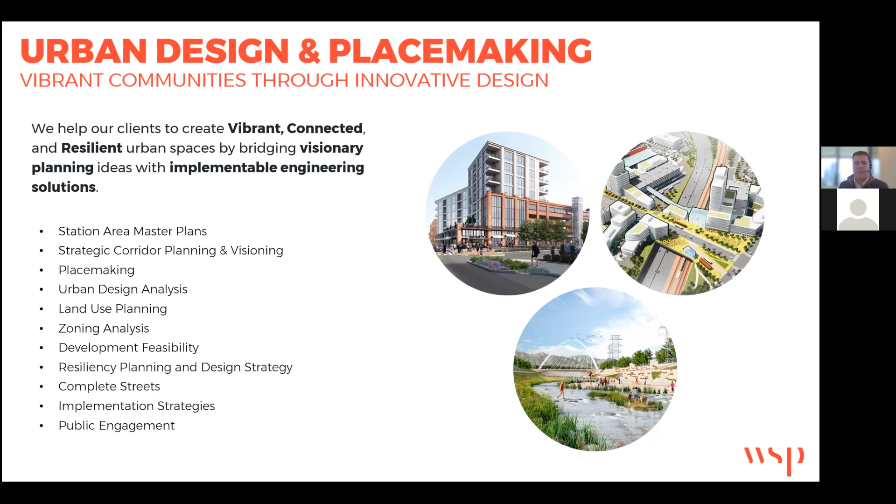What we've seen over really the last 200-300 years is just an increase in urbanization. That's not a new trend. I'm sure you're roughly familiar with it at a global scale, but it's happening at a phenomenal rate and continuing to do so. Our cities have always struggled to respond to these new innovations and the rapid population growth and shifts. Through globalization, of course, we saw massive shifts in population as well, so some cities grew and others began to shrink.

What we're seeing now as we move into the information economy and the revitalization of manufacturing at different scales, beyond just heavy manufacturing, is the revitalization of urban cores within the United States. No place is this more predominant than in the Midwest, where a lot of the earlier manufacturing left for various reasons, and the population with it. It's taken about 50 plus years to really recover and draw talent, the intellect, the human capital back under new industries, new ways of generating revenue and economic transactions.

Now that we're there, our cities have had to adjust. Many of them were built around earlier forms of transportation—railroad, and then subsequently the car. Now they're having to adapt yet again to kind of stitch back together some of the impacts that have happened. That's one of the things we're going to talk about today in our case studies.

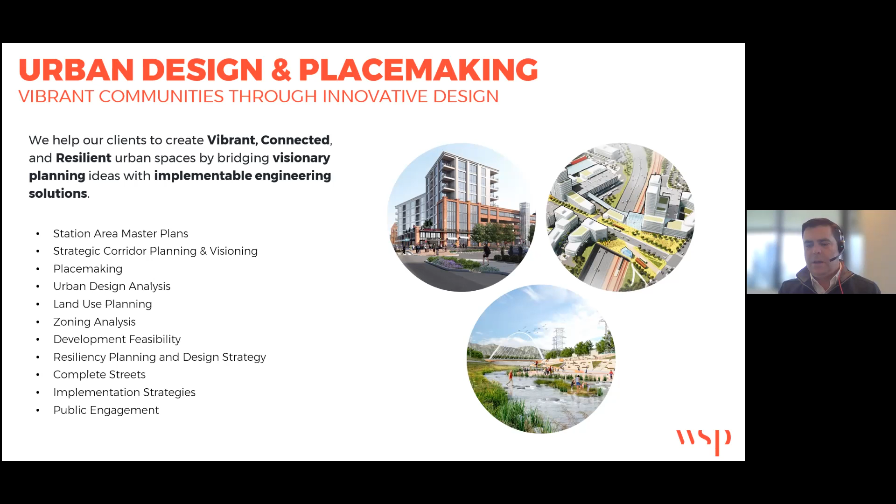So what are we seeing in terms of trends? We're seeing connected communities being a huge driver. Communities used to be connected by the automobile primarily, at least in many cities across the Midwest and beyond. But now we're seeing multiple modes of transportation—micromobility, pedestrianization, the increased use of rail, light rail, and intercity rail systems—as well as the gig economy with shared resources like the automobile or electric scooters.

In order for that to work, we need places we feel safe to move through. That's requiring an adaptation of the infrastructure built in many of our cities, focused really on rapid movement of the automobile. One trend we're seeing is stitching back together, reconnecting communities that may have been divided through large infrastructure projects that rolled through as part of urban revitalization programs in the 50s and 60s here in the United States. Along the way, we realized that many of the moves we made had negative impacts, perhaps accelerated due to rapid climate change.

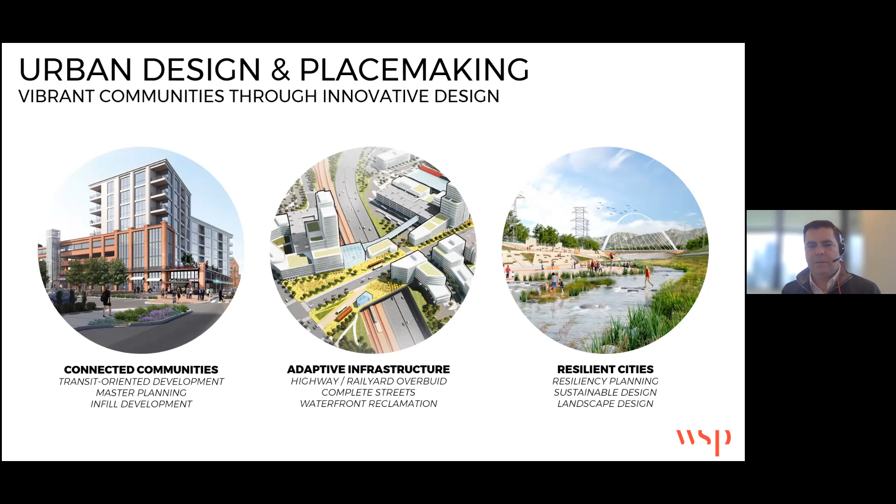Now, with any type of change within the urban environment, we get lots of complexity here. The displacements as one housing typology or density morphs into another. You have economic discrepancies that can emerge from that as people with more disposable capital may move into an area to get access to desired amenities, which has the potential to push people out.

Balancing housing and getting the right level of land use between housing, office, retail, entertainment, cultural, and education is always a challenge, and really falls on people who have to think about these issues long before we put pen to paper or put a shovel in the ground.

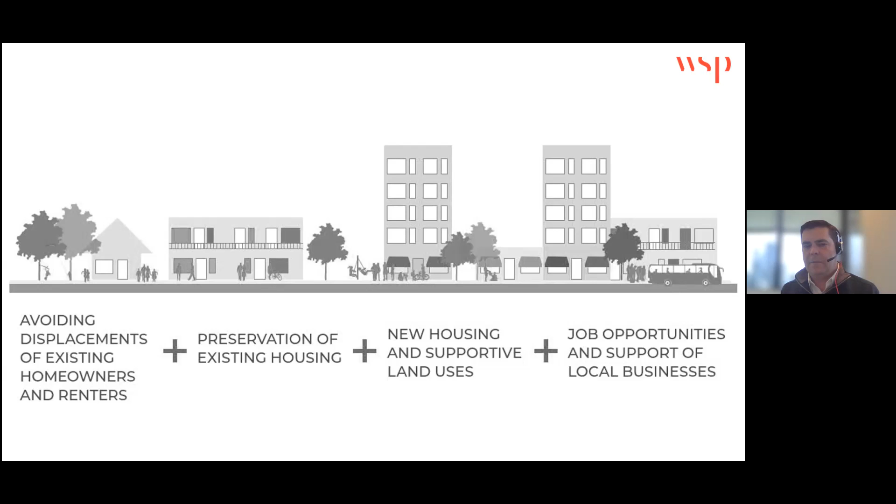And of course, making sure that we're creating job opportunities and access to those jobs, both locally as well as regionally, so that commutes for a wide range of economic backgrounds can get access to those jobs. This is part of what makes everything so complex.

One of the biggest trends we're seeing, which adds an entirely new level of complexity, is the rapid deployment of renewable energy at the utility scale and the balancing of electric demand with this urban development within the variable nature of those renewable sources, specifically wind and solar.

So in the background to everything we're going to talk about within the urban realm is this infrastructure that supports the buildings, the urban spaces, the human capital, the intellectual capital, and the transactions that make the cities generators of the gross domestic product.

So we've got rapidly deploying new technologies and new loads to balance in terms of the electric demand and when we have access to that electricity.

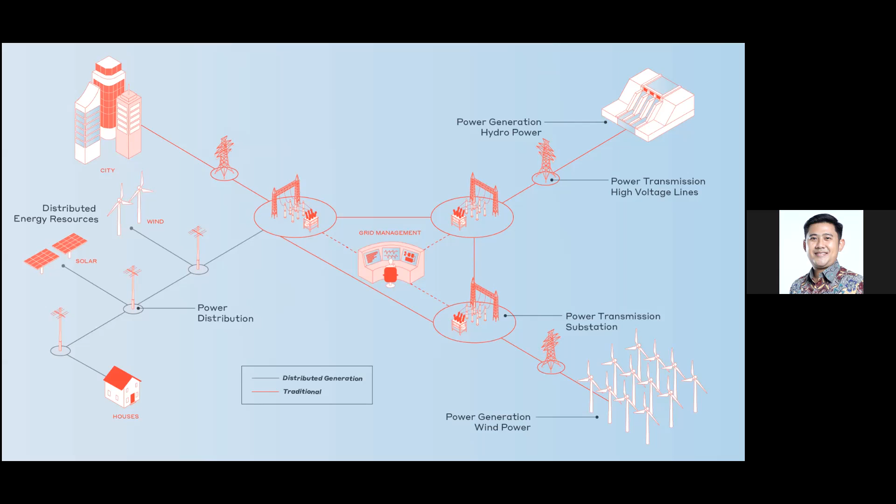And that is creating some interesting opportunities to integrate our transportation systems like electric vehicles with our electric generation systems like renewables, and managing that through not only the utility grid, but also microgrids that may exist, especially in some of these larger sites and larger developments within urban cores.

One of the things we're seeing as we begin to plan out these larger developments at the district scale is beginning to shift away from natural gas as a component of the heating and cooling, or even the manufacturing that may be going on in some of these sites.

That's relatively new, a new way of thinking, a new way of planning, a new way of discussing infrastructure. And it's creating some really interesting opportunities to integrate our transportation systems, our energy systems, our water systems, and ultimately our building systems into a cohesive package.

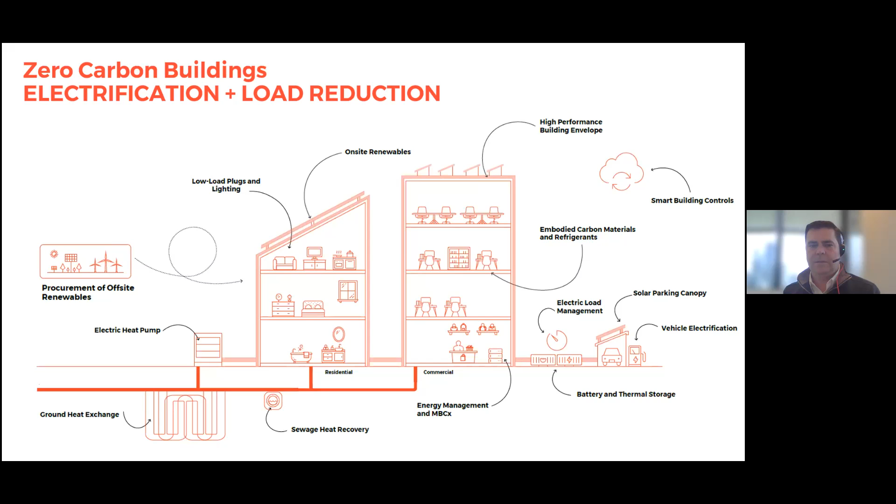So I just want to show some of the projects that have been going on where we're beginning to see some of these trends play out.

One of the things we're seeing is the need for transit-oriented development, and using transportation as a way to spur the right type of development that balances the pedestrian environment, multiple modes of mobility, and economic opportunities.

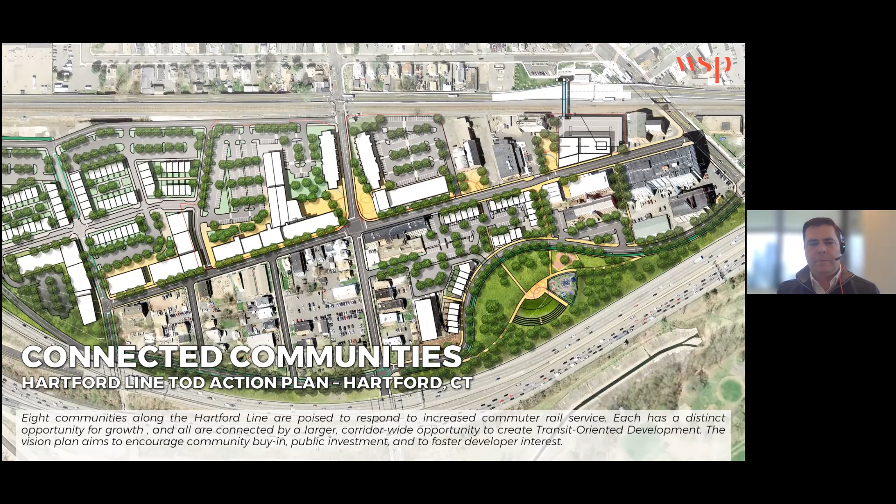Making sure that we're thinking about complete streets. No one is saying that the automobile is going away, but realizing that the automobile shares the streets with the public, the pedestrian, the bicyclist, and micromobility platforms in a way that is safe and inviting.

And that actually, we know, creates additional economic revenue by generating more points of sale, a more pleasant environment, and a more safe environment.

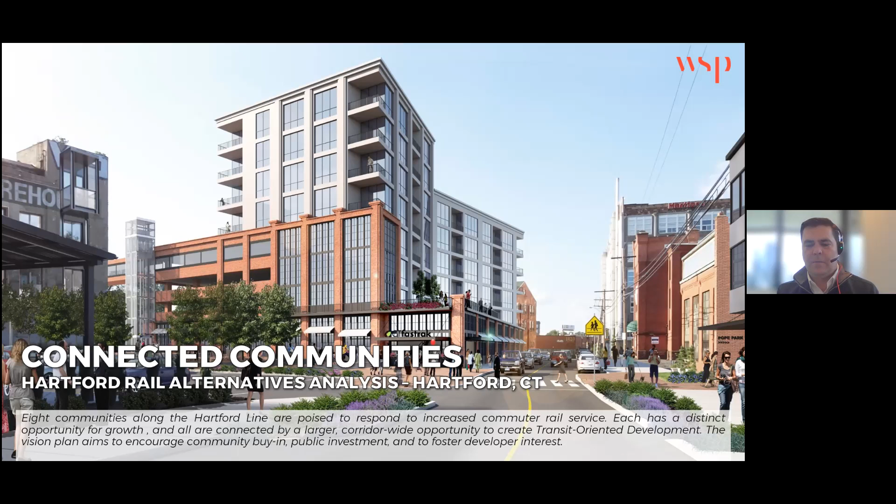And this also is spurring the kind of reinvention or reimagining of the town center, thinking about what it means to have a live, work, play environment, a 15-minute walk to all the amenities and resources you may need, what that lifestyle is like, and how technology connects it all together, whether that's Wi-Fi or just high-speed internet access.

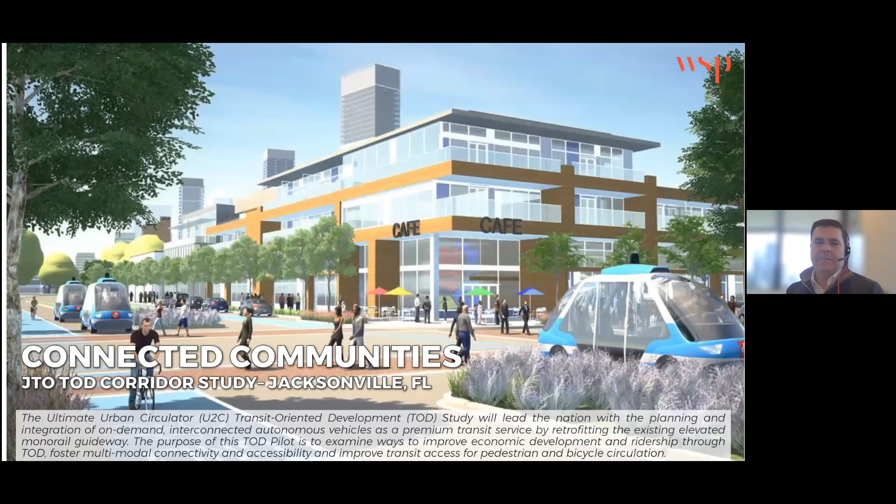Or thinking more about digital twins as a way to manage these assets and make sure that they maintain their profitability and efficiency. One of the things planners really need to focus on is making sure they are simply suggesting land use patterns and densities and creating the framework for these exchanges, these exchanges of intellectual capital, human capital, and ultimately economic exchanges.

So the examples you see here are just suggestive of buildings and providing guidelines to developers and visualizations to decision makers, rather than explicitly developing architecture.

One of the trends here is utilizing the abandoned space above many of our transportation systems. And that's an inherently expensive proposition to bridge over a large highway or rail system to stitch back together that scar. But the advantage of that is that it unlocks a lot of underutilized land within our urban cores. So you see here land bridges where reconnecting or expanding the usable space, whether it's parkland or developable land, to stitch back together a neighborhood which has been separated by a transportation system.

It's an incredibly useful way to add value to land on both sides of the highway, taking what had been something that buildings would turn their back to, or that may be seen as a negative to the land value, and flipping that into an amenity, covering it, reducing the noise or air quality issues through overdecking. And that is what the case study I'm going to talk about here in just a little bit really strives to do.

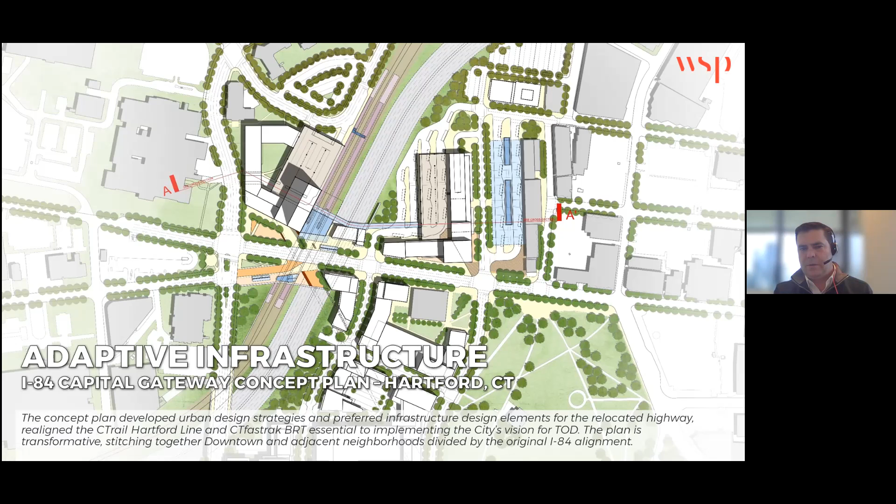There are many examples of this happening at various scales across cities in the United States and elsewhere, where unlocking the value of the air above these transportation assets spurs development and creates the opportunity for innovation corridors. We're seeing light manufacturing pop up around here because having access to the highway is important for distribution. It's also allowing landlocked or previously landlocked institutions, like higher ed campuses, healthcare campuses, science and technology campuses, to expand into areas that were maybe on the fringe.

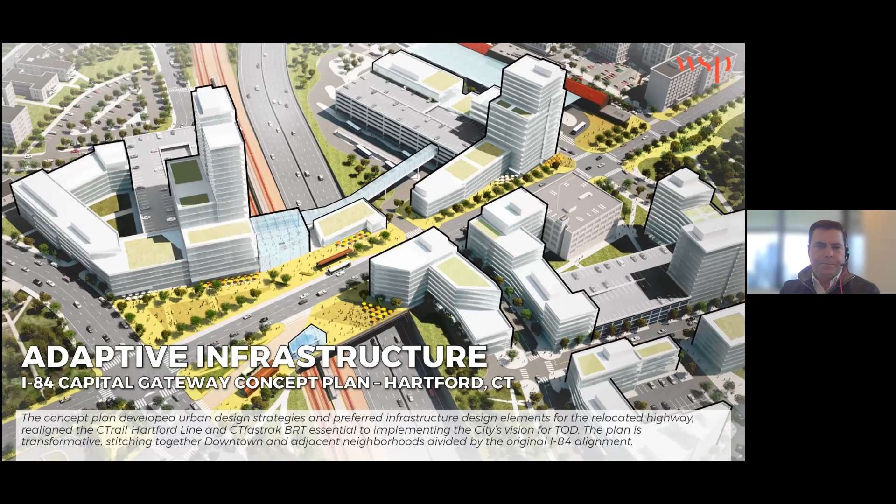So the area, the land directly adjacent to a transportation system or an infrastructure system, or directly above, is key when thinking about the flow of the pedestrian, the flow of multiple forms of mobility over or under these infrastructure systems that were built in the 50s and 60s to make automobile traffic more efficient in and around our cities.

I think at this particular time, there's sometimes a trend to thumb your nose at older technological solutions like highways, without understanding the times or putting the decisions that were made in context. The reality is that many of those transportation systems built in the 50s and 60s solved huge problems that the cities were facing, and enabled transportation networks and the supply of goods and services to our cities.

It wasn't necessarily done the way it was envisioned. Many of these were envisioned to be overdecked, but there wasn't enough money. So now we have the opportunity to unlock that value by going back in and reevaluating those systems, thinking about how we interlace, intertwine, or connect multiple forms of mobility there.

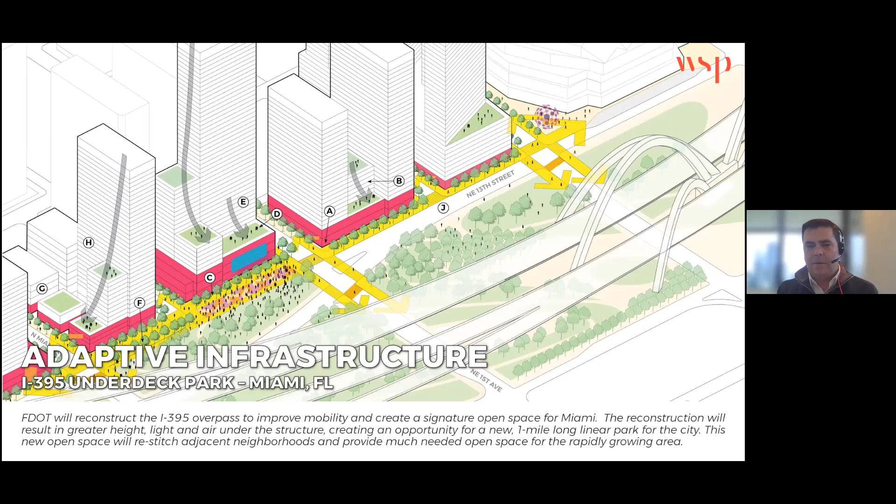And not only our transportation systems, but also other infrastructure systems, such as water management systems and culverts, realizing that the movement of water is important not only for flood prevention and water management, but also to create an amenity. So taking an area that may have been underutilized or not necessarily driving value and creating an amenity is a trend we've seen for quite some time now, and we expect it will continue.

Once that infrastructure system is converted into an amenity, it suddenly drives the value of the land and works as an attractor, and that can create new opportunities and generate new revenue for the cities.

One of the challenges here in Chicago, as I begin to switch to our one central case study, is that a city government generates revenue primarily through taxation of some sort. That taxation comes through taxation on income, direct income to individuals who are working and companies that are working in the city, and also through property tax, taxation of the land based off the perceived value of the land relative to its location.

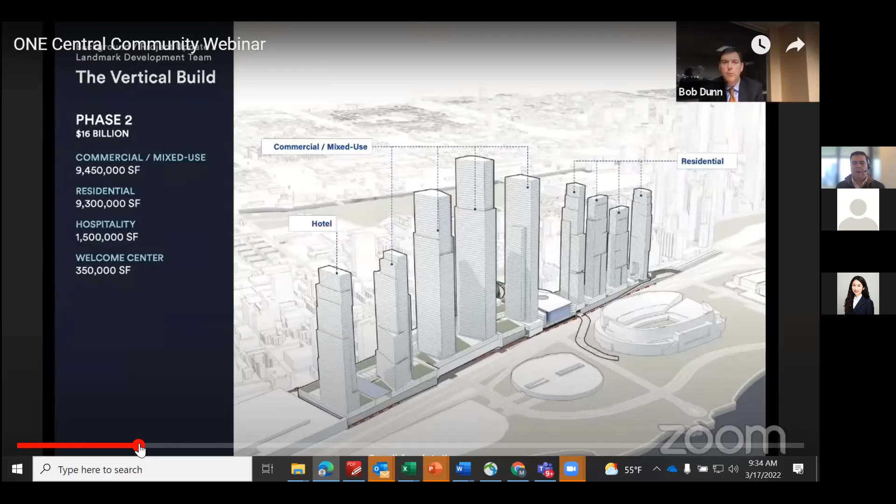This isn't the first time this has been done—it happened in Hudson Yards in New York, another example of underutilized space above a very important railroad connection point. Through platforming it, connecting it to things like the High Line, and creating public realm, you're able to increase the value of that land tremendously.

There's still an argument for ancillary benefits through personal income taxes from created jobs, and spin-off benefits in areas adjacent to the development, where property values and desired amenities increase. This project takes a slightly different approach. I'm probably not the best person to explain all the details, but it's interesting that it creates a public-private relationship specifically around the transit systems and transit hub, in order to turn the asset over to the state and city to run after an agreed-upon time.

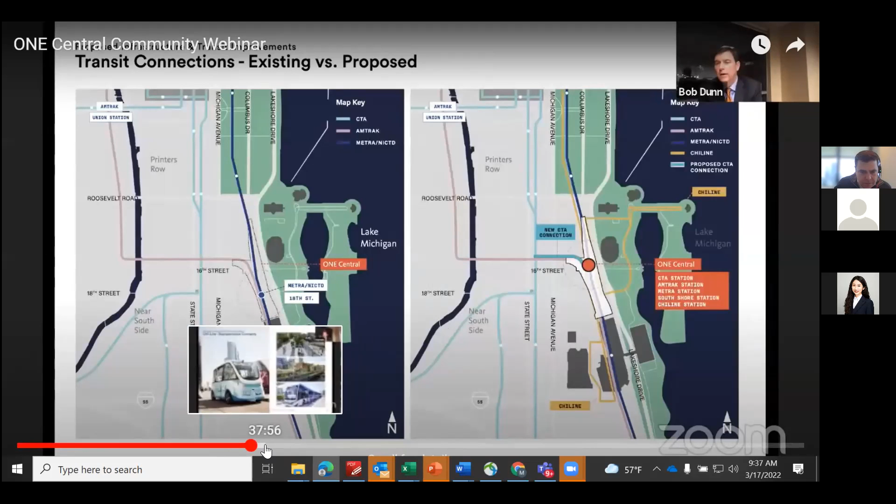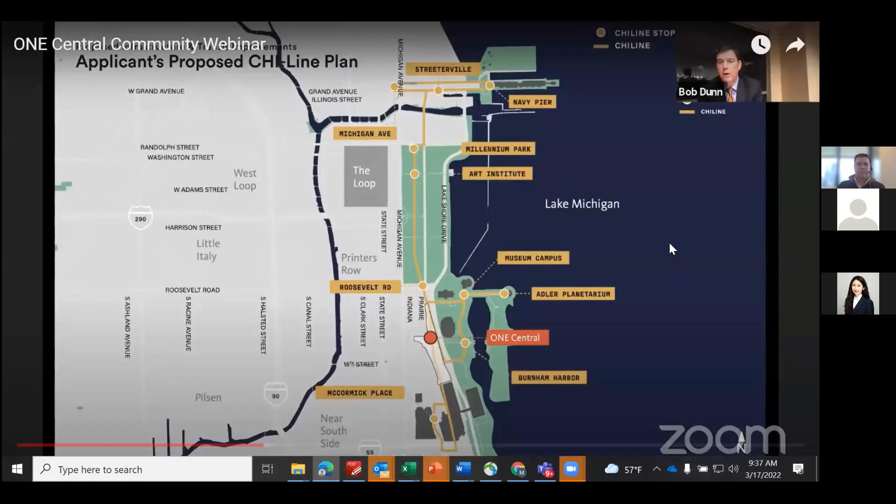I'm going to skip ahead, give me one second to get to the right time frame. I'll hit play and let some of the transit components and architectural endeavors be explained, if I can get my audio to work. Hey Matt, I don't think we hear the audio.

Got it. So this is basically what's referred to as the CHI-Line. It's a proposition to have a bus system, privately supported, but serving the downtown loop area.

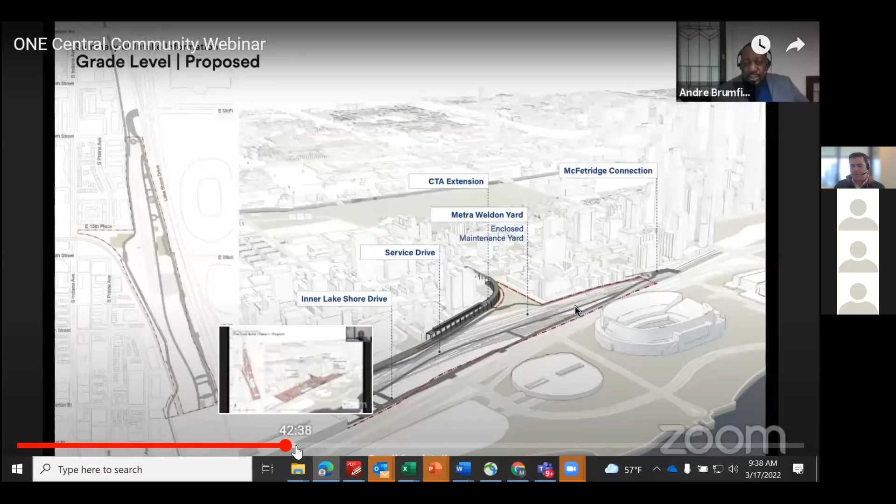I'm going to skip over to the architectural buildup here and talk through some of the components. As we said, there's an existing rail yard, and at one point there was a proposition to have an extension of one of the existing CTA lines. The plan has evolved since then, so the applicability of where we're at currently may have changed.

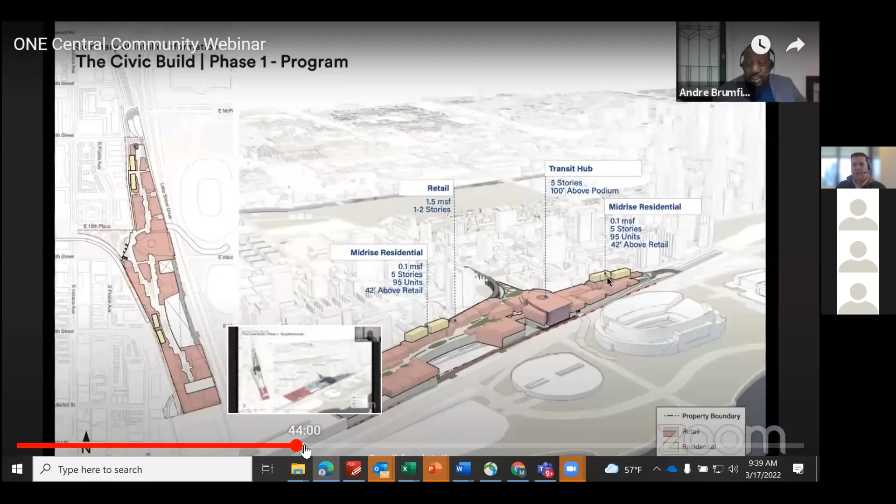Then as a next phase, after some track realignment to allow the structure to engage with the ground, the Civic Build comes in, balancing out a wide range of retail and amenities, the implementation of a pedestrianized urban street, and below parking on a plinth that spans over the tracks. Parking has already begun to accommodate electric vehicles, rideshare, and other forms of mobility.

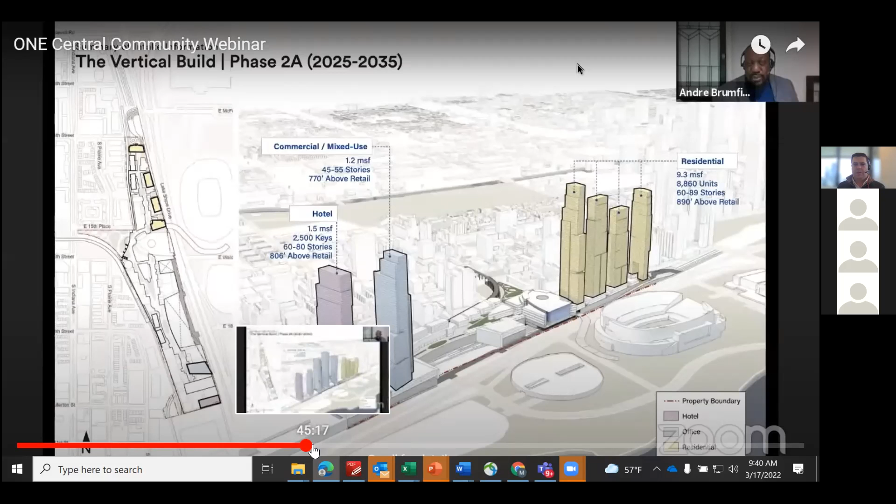Then through a phased build-out, a series of privately developed towers connect into the Civic Build. The exact massing is to be determined, but the advantage of the towers, as you've probably learned, is a dramatic increase in density. And of course, when you have density, you need the transportation infrastructure to allow mobility access to and from these new towers coming in along the lakeshore.

So if we go back, we look at the development patterns in and around what was originally referred to as Central Station and is now becoming One Central. There's a strong connection to some of the land use patterns that have historically existed and the ability to access the transportation networks in and around Chicago.

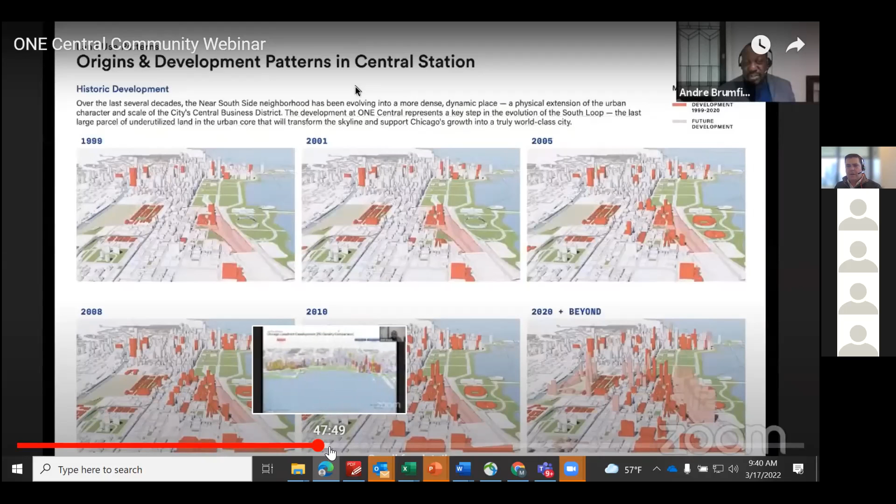So one of the propositions is that this enhancement to the connectivity of the existing transportation systems spurs economic development, not only on the site but in the surrounding areas, by creating jobs and, perhaps most importantly, providing access to those jobs.

This gives you some context to other developments with a similar development pattern over on this side of the city over the last 15, 20 years, increased density in areas that were previously underutilized, generating large amounts of revenue for the city through property taxes as well as personal income taxes.

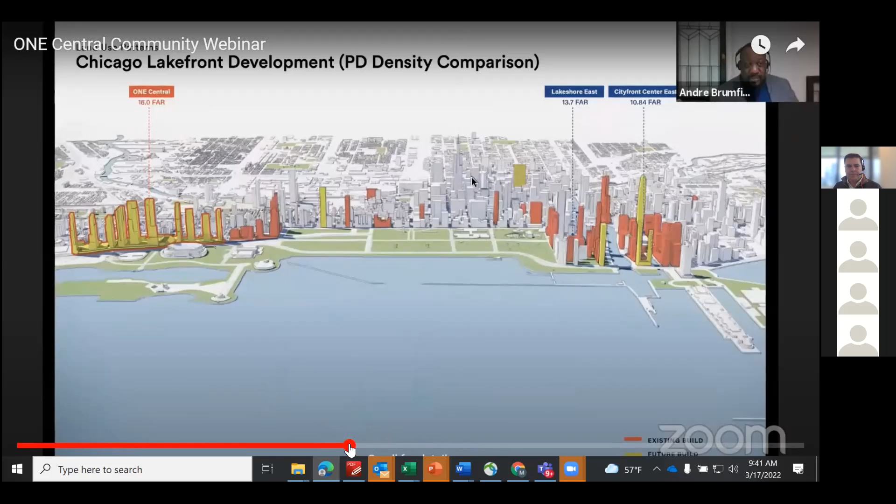Anytime you're beginning to adjust, add, or subtract to an existing land use pattern, there's always fear and concern regarding the impact of that change. And that's where a lot of the engineering comes in, being able to think through those and predict the changes that will occur, and begin to come up with strategies that ideally enhance the overall urban environment rather than creating problems.

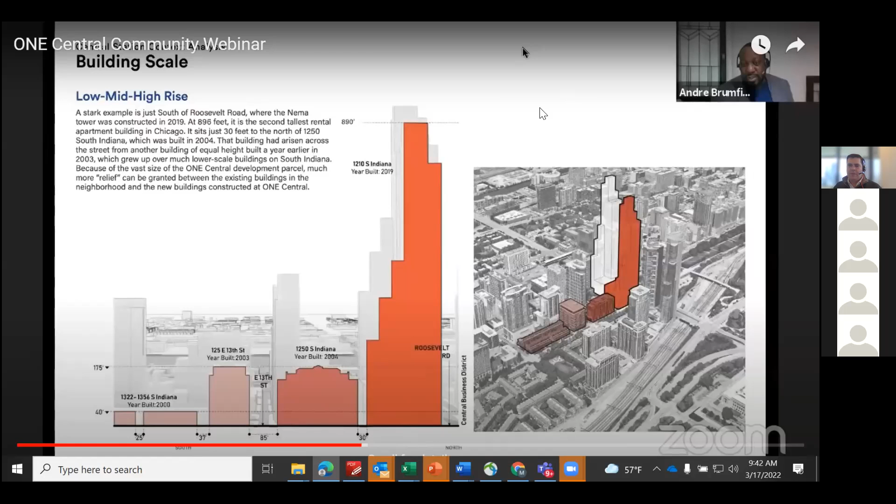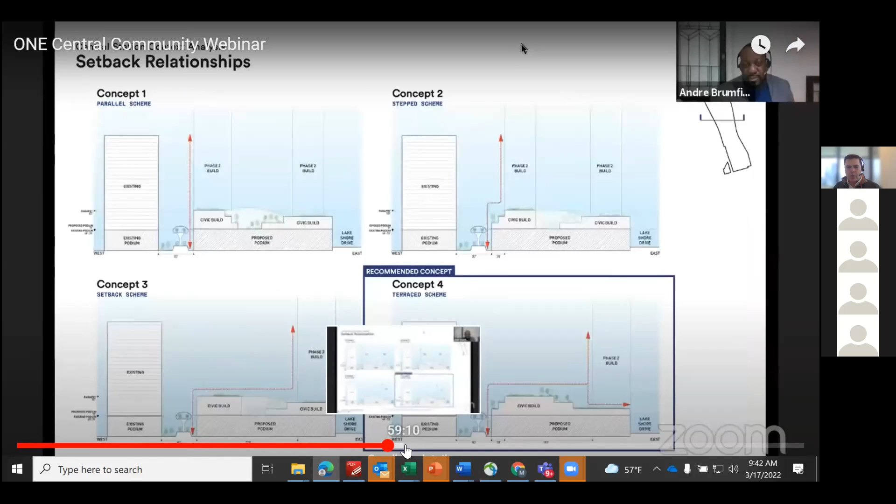And that's where I think the transportation studies that were done to assess how this could possibly be implemented and the potential benefits came in. We worked closely with Gensler, also looking at the relationship and scale of the buildings and what the appropriate density would be to maximize the potential value for the site without degrading the urban quality. In fact, the primary goal is to enhance it.

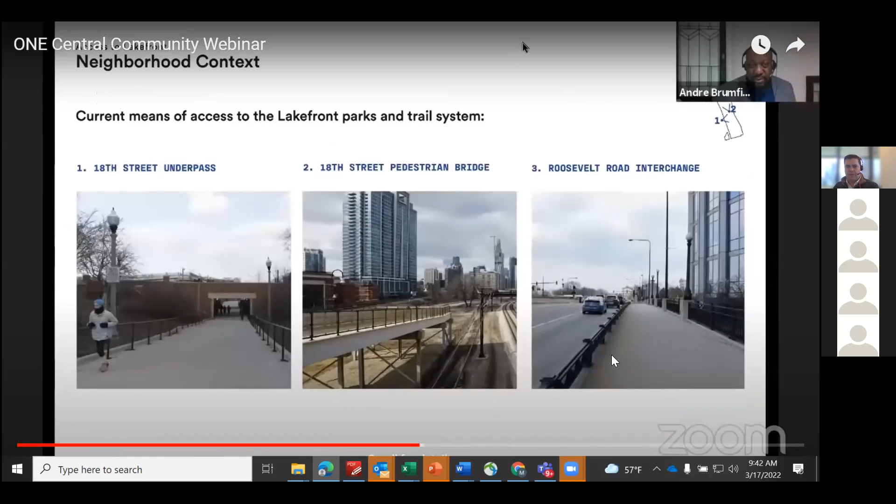So you can see some of the current conditions, and then through the overdeck process, you're creating more green space, more landscape, creating this urban pedestrian corridor that ties into the transit hub that allows a pedestrian environment to expand regionally because of the connectivity to the trains moving down below. And then an additional pedestrian bridge to increase connectivity to the entertainment and cultural venues, as well as park space and ultimately the lake here, which is a huge draw to the site already. Providing additional access points and transportation options is a key driver.

So if you think about the number of jobs, the number of points of sale that can begin to populate this area, which currently supports very few jobs, and the corresponding revenue that could be generated for the city through various forms of taxation, it becomes a win-win. The city gains revenue, private development gains revenue. You end up with an enhanced urban space, creating new experiences, new places, new forms of identity, and increased connectivity to an existing amenity.

These are the types of projects that get me very excited because the impact that they have is so substantial. But so are the challenges. Obviously, a development this large has a pretty significant impact on the existing infrastructure systems, including water, waste, energy, transportation, mobility, and the communities.

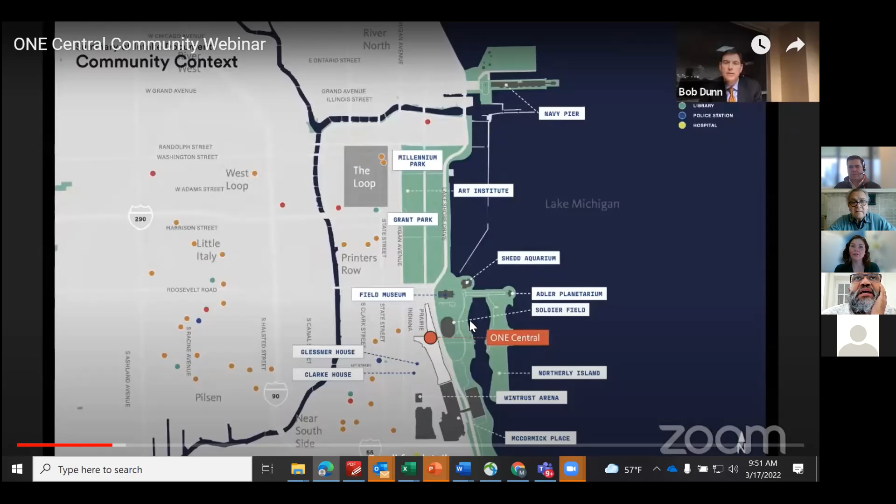So there is not going to be a station there for people to arrive at this location? I know you mentioned that this rail line is used by multiple transportation systems, but are they going to add—okay, so the transit hub, but that's not a bus. Is that actually a stop for CTA? Well, it is definitely going to be a stop for the Metra, the commuter line, and the thought was CTA was going to intersect into it.

The funny thing in Chicago, which was a fun challenge for us—and you guys have this in New York too—is some of your lines are here, some are here, and some are here. In Chicago we have the subway and the elevated, which is separated by like six stories, and the commuter Metra line is at grade, if not a little subgrade. So now we're trying to smush all that into one very large building in order to connect them all.

The status of the very highest line coming in, which is the L, the CTA—that was going to be a spur off of, was that the green line that we were doing? I have to relook at the plans. That I think is still in negotiation. That was always part of the plan, but there have been some either political or money and resources issues. So yeah, the idea hasn't gone away.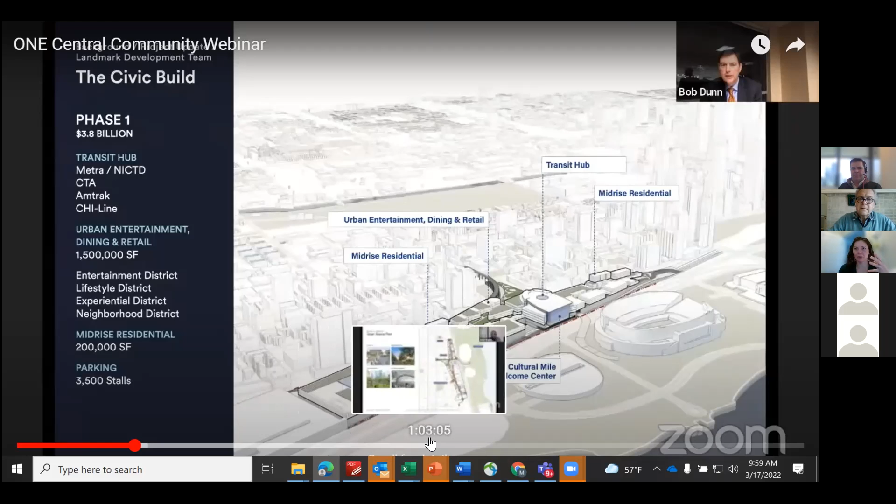And you know, this is interesting. There's a few of these 'creating a neighborhood' projects in Chicago going on right now. None of them have really picked up a lot of momentum, I should say, because it's a very large endeavor. This is a decade-long kind of commitment, multiple decades, and each one of them are introducing very large green spaces.

And in the discussions with the Chicago Park District, the thought was, hey, we're going to create a park and we're just going to turn it over to you. And the Chicago Park District was like, you know what, we're good. In the sense, they love the idea, they champion the idea of keeping green spaces, or creating, like in this particular case, there wasn't any green space.

It is rail yards, so they are actually introducing new green space to a previous concrete jungle. The Park District's view is that it will take additional resources, bodies, lawn care, you name it, to maintain these green spaces that didn't exist before. So if the developer commits to creating them, the Park District will permit the developer to maintain it themselves. So it's not technically a public park, but it is open to the public, and it's just someone else paying the bill to water the lawn.

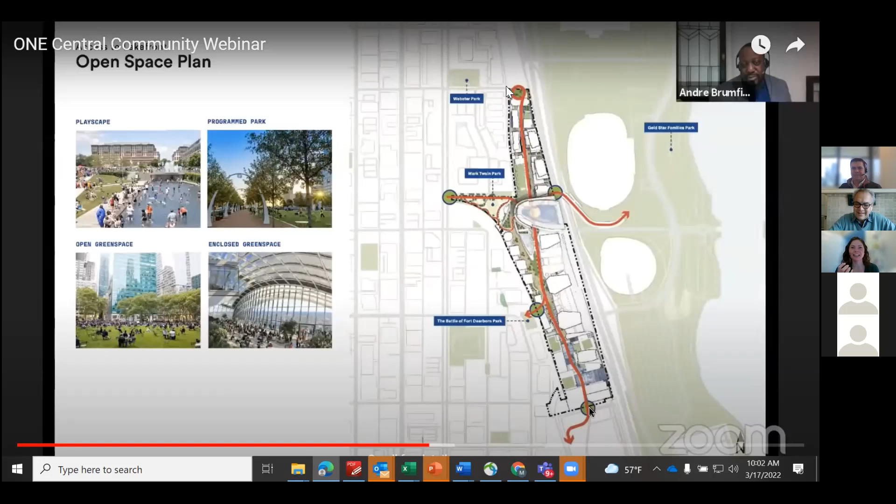And you have to do it all suspended over a rail yard. So if a pipe breaks, you can't just say, sorry train, can you pause for a second? That's not going to happen. So not only do you have to figure out how to create a new neighborhood and the infrastructure behind it, but also how to maintain it without literally derailing a train.

Politics were mentioned, and the duration of a project of this scale obviously spans several different mayoral administrations to complete. You may find there are multiple mayors, depending on term limits and continuity. Given the empowerment by Bloomberg, whether it was the funding or just the making it happen, is there a single person, political or technical, who can claim credit for the inception of this, or was it just an inevitable extension of the Burnham Plan?

There are multiple studies done over the last probably 30 years by the Urban Land Institute and other public and professional organizations that identify decking over the railroad scars as an important component of future urban development. That was true in part at Navy Pier as well as Millennium Park, two unique components of the Burnham Plan which have been completed incrementally.